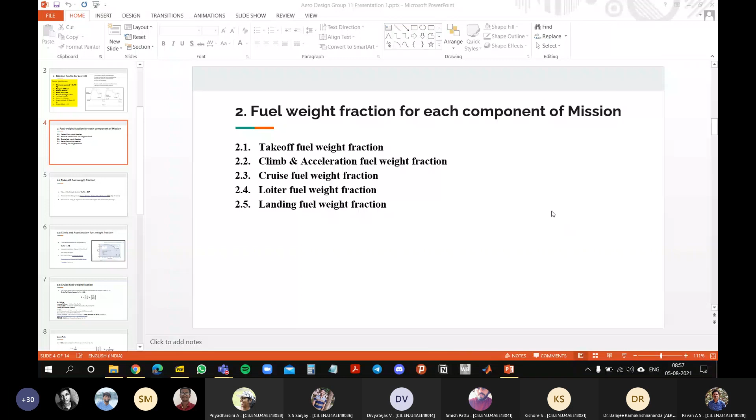To the first group, I say, now it is Pavan, military transport. Yes, sir. Good morning, sir. Good morning. You can start sharing. I will start sharing. Is the screen visible, sir? Not yet, Pavan. It's visible now. Okay.

Okay, so good morning, everyone. This is military transport aircraft weight estimation by Group 11. So this is what we're going to see in the presentation today, and this is the mission. On this slide, you can see the design specifications that have been given to us in bold. So our aircraft must be able to carry 20,000 kg and have a range of 5,000 kilometer, be able to carry out a rescue mission, and it should be able to carry out short takeoff landing or vertical takeoff landing, and has a service ceiling of around 14 kilometer.

So based on the specifications given and mainly the VTOL specification given, the range, we decided to go with a turbojet engine. We saw that presently in most of the military transport aircraft, they either use piston prop or turboprop, but having seen the vertical takeoff landing, short takeoff landing aircraft that are currently being used today, a turbojet engine would be better. And we also saw the number of crew that is usually there for a military transport, a very small number of crew really. It's only the pilot, co-pilot, and one or two to handle the ordnance.

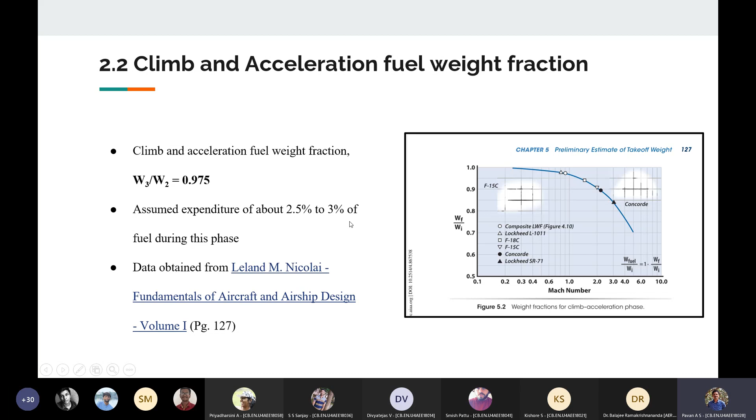So going to the fuel weight fraction for each component. First is the takeoff fuel weight fraction. This we got from the Thomas C. Corke Design of Aircraft book from the data given here. Since it's a long haul aircraft and a big one, we consider a higher fuel weight fraction of 0.97. Moving on to the climb and acceleration, we got it from this graph from the Fundamentals of Aircraft and Airship Design book. Since we have considered a cruise Mach number of 0.8, the corresponding weight fraction is around 0.975, about 2.5% to 3% of the fuel during this phase. So both takeoff and climb we get from existing aircraft data.

Go fast. Yeah. Next is the cruise fuel weight fraction; we use the Breguet range equation. Like I said, we calculated it for the first half of the mission, range 2500. We got L by D max from the data given here, and TSFC of 0.9. 0.91 or 9? 0.9, sir. This is the unit. Oh, but 1 is not necessary. 0.9 per hour will do. Okay, sir.

So we have done the calculation for this, and next, this is the aspect ratio. We have to do this for the aircraft. And next is the loiter fuel weight. We considered a loiter time of around just 30 minutes for our aircraft, and we again use the endurance equation for this.

Why have you used a different TSFC? Okay, we'll ask later. Okay, sir. I'm doing this mistake of asking questions. Actually, your classmates should ask the questions. Yeah, I'm sorry. Go ahead.

Okay. The TSFC is changing here at loiter stage. So again, we plug it into this equation. We get a loiter fuel weight fraction of around 0.979. And then for landing, again, we got from data obtained from the Corke book 0.975. So the next step was to multiply all this and get a total weight fraction.

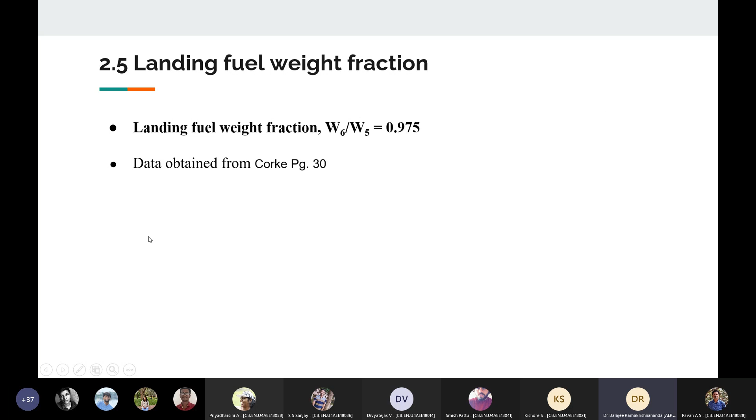Because the TSFC does vary with speed and height, but as a first approximation, we consider it as constant. Okay, sir, we'll take care of that. Then another thing is your process. Show me the final one. W1 by W2, the weight fraction. Something is 0.8. What is W4 by W3? 0.85. This is the cruise weight fraction, sir. First one or second one?

The thing is, we assumed both to be the same, sir. Don't assume, they won't be the same. Okay, sir.

Who's answering? Nandha Kumar. Yes, sir. Let him answer this time. Sorry, sir. It's okay, because you'll get your chance next in whatever presentation. Tell, Pavan.

Sir, it will change, but we didn't know how to account for the changing L by D, cruise height and velocity, so we assumed it to be the same. See, it may or may not be the same, right? Because you're taking the same cruise altitude, but fuel weight will be different, right? Yes, sir. That is where we had a lot of questions. So the problem with you is you have weight addition or removal in between your mission profile. Yes, sir.

You have weight addition after this, correct? So don't go by this formula. What you should do is first calculate not the fraction at the end of every phase, but the actual weight of the aircraft. Then you also separately calculate how much fuel is consumed for each phase. There are two things you have to keep track of. After every phase, what is the weight, not weight fraction. From the weight fraction given, what is the actual weight? You will have the data when you are calculating.

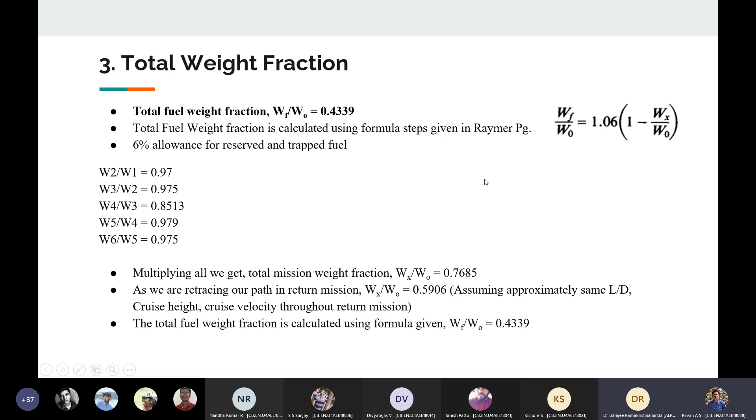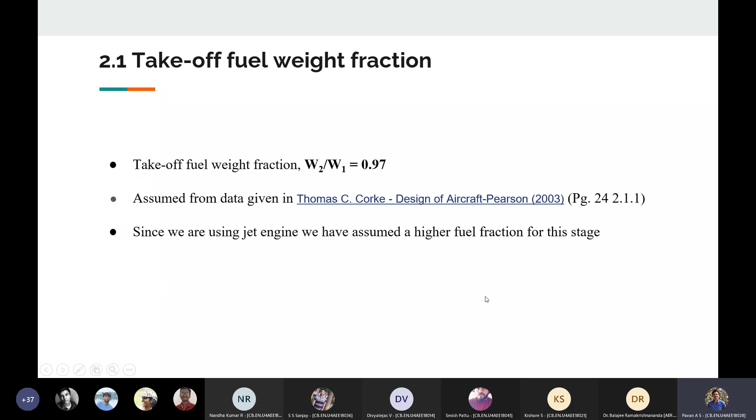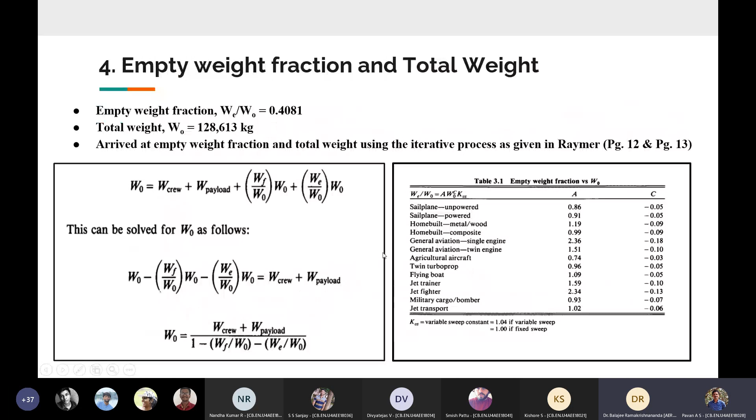When we were calculating the cruise weight fraction, the first time we assumed that the entire range is going to be 10,000, that is, from here to here is going to be 5,000. That is what we assumed this specification means. And when we did that, our final takeoff weight came to around 700 to 800,000 kgs. Because for a longer range, you will get more fuel. So that is too much weight, not correct, right?

It depends. If I give you crazy specification, you'll get crazy weight. If I take it into a space problem, I'll give you 100 kg payload. What is the weight of the satellite launch vehicle to take it to orbit? It will be several tons. The payload will be only 1 to 2% of your whole weight.

Now Sanjiv has a question. Let him ask. Welcome, Sanjiv. I applaud you for asking the first question in this course. Sanjiv, what is the question? Hello, Sanjiv. We are not hearing you properly. Can you hear me now, sir? Yeah.

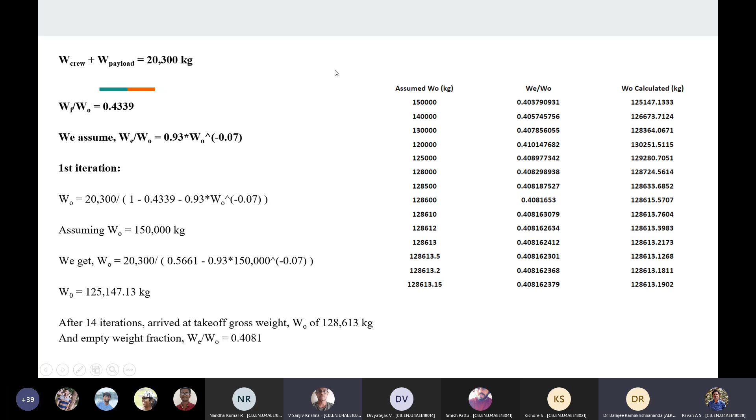Sir, you asked Pavan to calculate the fuel weight fraction for each phase of flight. Then why can't he just calculate it for the worst case scenario so everything else is taken care of? What is the worst case? You ask him, I should not answer. Pavan, you understand the question? Sanjiv, I don't understand what you mean by the worst phase. Do you mean what we have already done?

For example, you can't take more than a certain weight in your aircraft. So if you calculate for that weight, you don't have to worry about the weight differences in each phase of the mission. Sanjiv, can you ask again? Sir, you said the total weight of the aircraft changes for each phase of the flight because he is delivering some equipment, and he also takes some patients, so the weight increases.

What I'm asking is, if he fixes a certain weight limit, you can't take more than 20 patients, and calculates for that limit, then he doesn't have to worry about the fuel weight fraction change in each phase. No, he has to, if you deeply think. Sanjiv, I think that is what we have already done, assuming maximum payload of 20,000 for both ordnance and rescue. See, I'll tell you why. You can still go ahead with the fraction way of calculating until you add the weight.

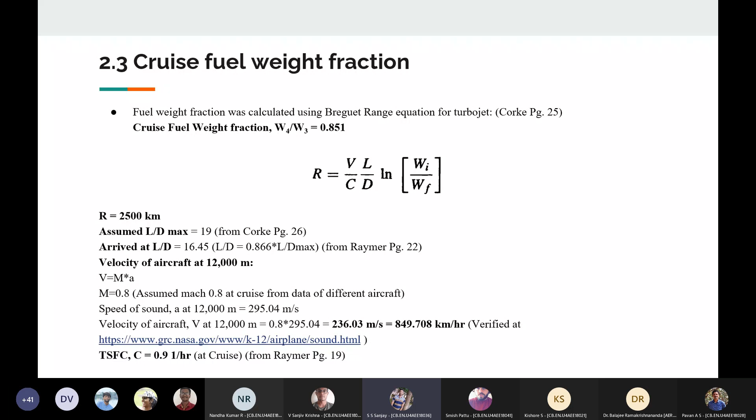The first one is, can you go to that cruise phase fuel weight fractions estimation? Yes, here. Yeah, the next one is, yes, this one. Loiter, sorry. Loiter. Okay. So here you said...

Sanjeev, excuse me. Sanjeev, what's your roll number? I forgot. Sanjeev sir, or Sanjay, his voice is breaking. Sir, Sanjeev's number is 37. 37. You are 38, huh? I am 36. 36. Okay.

Go ahead, please. So Pavan, you have approximated L by DC as L by D. So in this case you should not bother about C, right? If you have included C, does that affect your calculation? No, he has not included. He approximated as L by D. Correct, Pawan? Yes, sir. We have approximated it to L by D, but we just wanted to state the TSFC that we are assuming here. Okay, but this difference doesn't change the calculation.

You mean to say if we don't approximate it? Yeah. Because I did it for my calculations and I got some minor difference. Oh, do you mean to say you assume L by D as L by D max, but take C separately? Yes. We did do that calculation, and here we got 0.979. That one we got around 0.975. And since it was not a very big variation, we thought we'd go with this one. Yeah, it's okay because this C here is almost near 1.

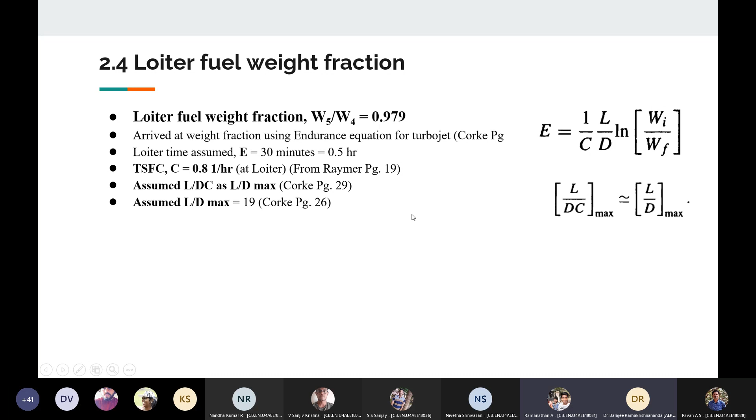Sir, this is not actually a question. This is just an observation from Sanjeev's question. He told that let's take the worst case scenario. Tell Pawan, he's the boss now. He's the teacher now. Okay. So if you are taking the worst case scenario, then we might be carrying extra fuel which we may not be using in the flight throughout.

Yes, yes. So in that case, I mean, in that way, it is not feasible and it's not doable. That's what I wanted to ask. You mean to say, Pawan, assuming the worst case is not, right? So till the rescue itself, we are assuming there is more weight to be carried, and we carry fuel for that particular weight. But then we know that there won't be much weight till this point of time, so we won't be using the rest of the fuel. So in that way, it is actually carrying more weight without any reason.

Okay, yeah. I think that is the whole point of a worst case. We never know how much fuel or how far we need to travel for a rescue mission, because rescue in its sense is very short notice. Wait. No. Although we don't know how far you have to travel, we still assume this plane can travel only till 2,500. If it is more than 2,500, use some other plane. Don't use this. That's where we stop. Understood? Yes, and that's what I was trying to say.

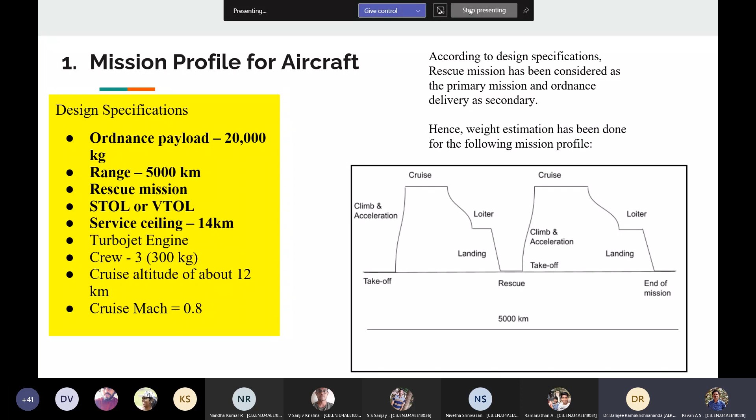I'll just share the screen for one brief moment. Pawan, thank you. We'll call the next group. Next group is what? Solar spy plane. Okay. Wait, before that, I'll just share to show you. I will give marks like this: group, aircraft, roll number, name, date of presentation. Individual marks out of 100 I have given. This is for the individual.

Now for Pawan, I will give 85 because he has answered well and he has done his work. Although he made some mistake, that's not a big issue. And I know the team has also worked together in it a lot. Nanda Kumar tried to intervene, but I stopped him. I can tell from the presentation that the team has worked. So I will give some 21 for the whole team. Everyone on the team will get 21 marks because of Pawan's presentation. Pawan will get 85 marks out of 100.

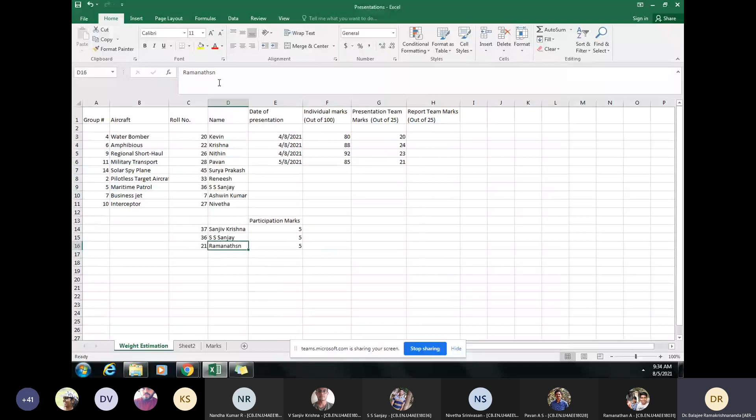Is it clear? Nivetha? Yes, sir. Then after the next presentation, or at an appropriate time, you can ask your question. You get the first chance next time. No, sir, I just had a doubt to get clarified. I got it clarified. Okay, good. Or you can call me after the class. I will clarify it.

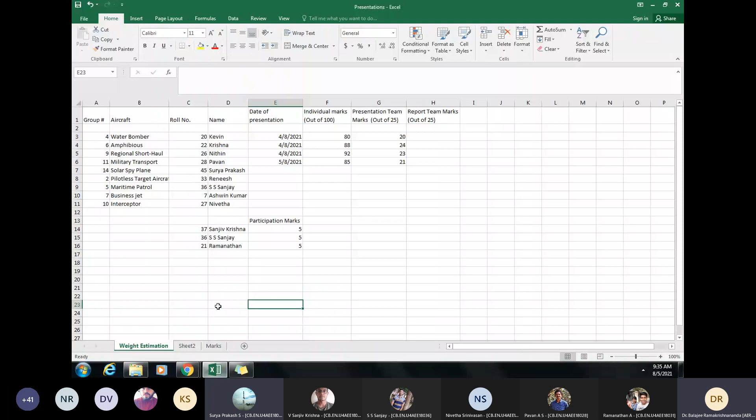Who's next? Solar spy plane. Who's giving the presentation? Surya Prakash, roll number 45. You can proceed, Surya. Probably you can do it quickly. Oh, only 5 minutes remaining? It doesn't matter. In the initial phases, I want to thrash out all the ambiguities, so initial presentations will be slow. I expect that. You can present next class. Okay, sir.

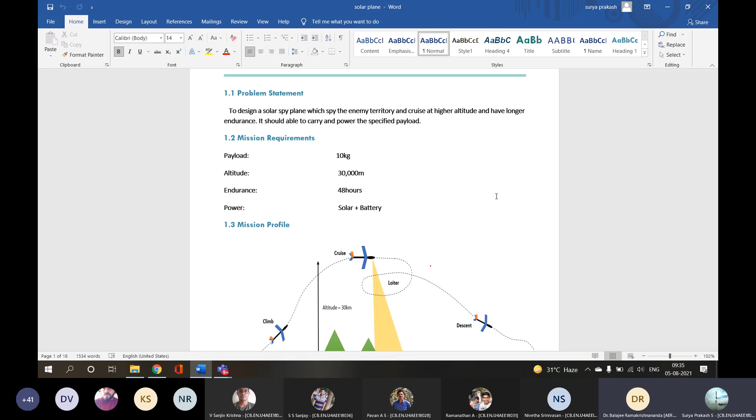Someone was telling something. Who is that? Yeah, Junaid, what is it? Junaid, are you there? I want to talk to you, Junaid. Are you able to hear me? Yes, sir. See, I have divided people into different groups. Now I'll be putting you in a group. I'll tell you the group number. Other group members, please include Junaid in your team.

Except these, what is remaining? 11, 12. Group 12, who's group 12? The team members of group 12. So Junaid will belong to group 12. What is the topic for group 12? Strategic bomber. So can you accommodate Junaid also in your team at this stage? Yes, sir. Junaid, you'll be in the strategic bomber team. You will be part of the group which designs a strategic bomber. You have to work with them. You may have to give a presentation.